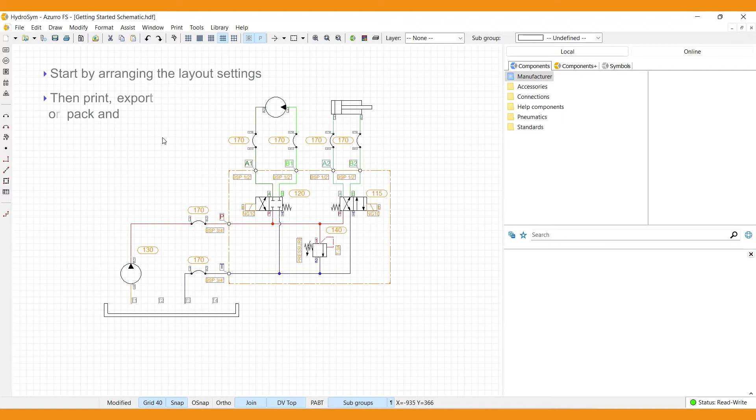After drawing up your design in HydroSym, you want to print or export it to share it with others. Start by arranging the layout settings to your liking. Then either print your design, export it by saving in another file format, or pack and save it together with all other HydroSym documentation in a designated zip file. If you prefer to draw in a predefined paper size or work with multiple sheets, it's also possible to select your paper size upfront in the canvas.

Okay, so we'll start with the layout of your drawing just here and check out some of the most important settings. This is where you change the paper size. See how this immediately affects proportions.

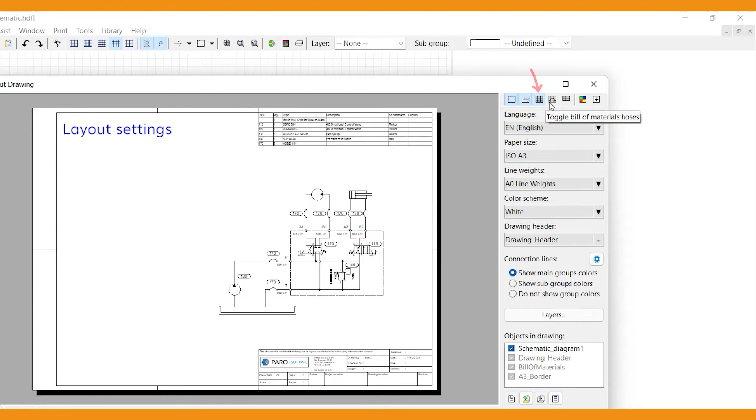Select here if you want to include a border, a drawing header, the bill of materials, your revision history, and if you want your output to be in color. If color is on, you can adjust the group colors of connection lines here.

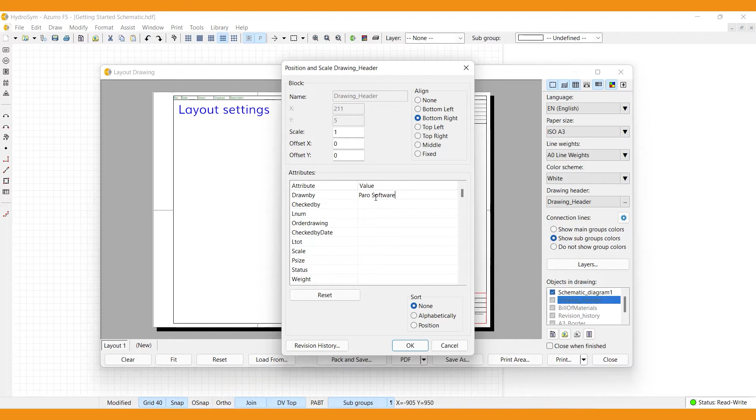Now to fill out your drawing header, left-click to select, then right-click and select Position, Scale and Properties, and add or change the values here. Or add or change them in the canvas by selecting Assist and Project Properties.

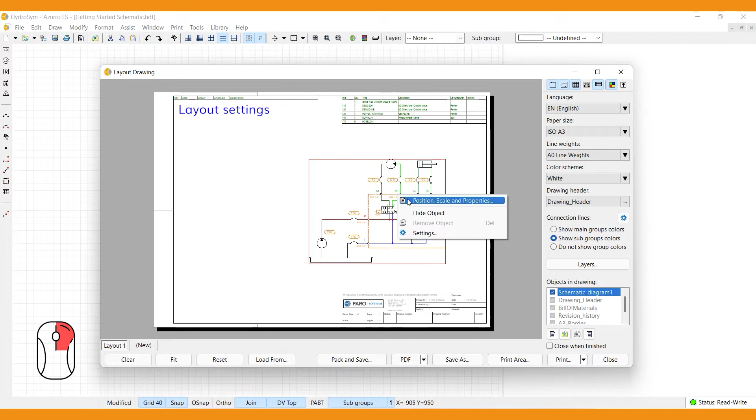Adjusting your drawing size to the selected paper basically works the same. Left-click your drawing to select, then right-click and select Position, Scale and Properties. Adjust the scale.

And if the proportion is right, but you are not quite happy with how your drawing is positioned, check out if your drawing is still selected. It should be framed in red. Then simply drag your drawing in line and left-click to deselect and undo the frame.

Great, now we're all set to generate our output. To just print your drawing, use the Print button. You export your output by saving it in another file format here.

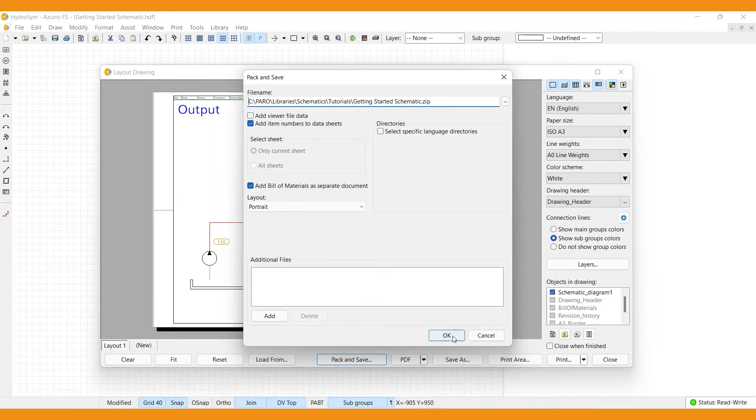Or use the Quick Save button here. Then last, but definitely not least, use the Pack and Save option to create a zip file that not only includes your drawing in PDF, but holds the bill of materials and datasheets with corresponding item numbers of all used components as well.

Okay, so much about the output on the layout drawing.

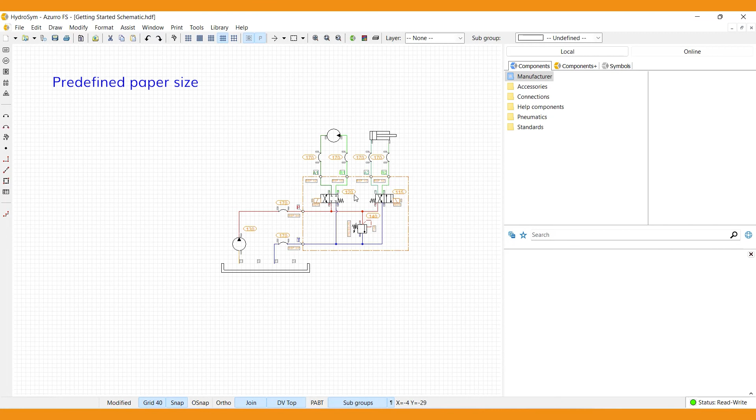Now if you'd like to design in a predefined paper size in the canvas instead of working in a free space, or you want to work with multiple sheets, it's also possible to select your paper size upfront, here in the canvas. Select paper size, then the new border or just part of it appears in the canvas in gray. If needed, first select and then drag the border in position around your schematic.

If your schematic doesn't fit to the selected paper, select the border, right-click and go to Properties, and resize here.